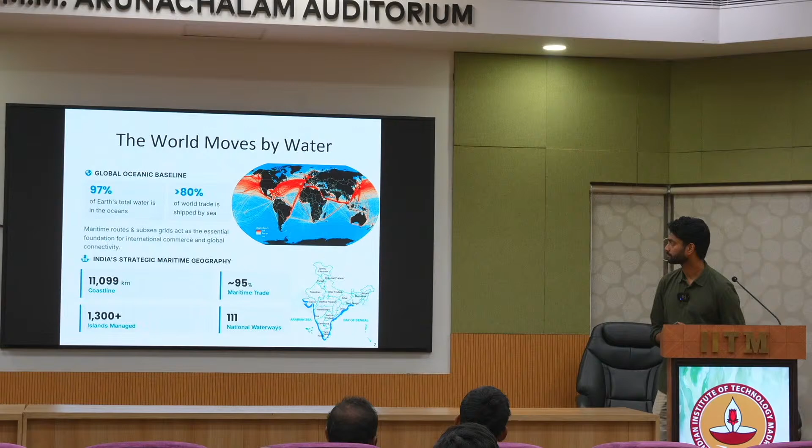So we already discussed briefly why naval architecture and why ocean engineering. We deal with ship designs and offshore structures, and also marine technologies. And then, why in IIT?

Because there are only 2 BTech programs offered among the IITs — it's very rarely available in all engineering colleges. For example, IIT Kharagpur has naval architecture, IIT Madras has naval architecture, that's all. Then Indian Maritime University, a Central University in Vizag, has naval architecture. And CUSAT, Cochin University has naval architecture, and Andhra University has naval architecture.

And there are very few private colleges which are not very well known — Amity University in Chennai also has naval architecture. So these are the colleges that offer naval architecture, but there is huge demand in the future because India and the world are focusing on maritime activities, for sustainable maritime activities, as well as to have a blue economy.

What are the careers? As of now, there is traditional naval architecture which deals with ship design, but now AI, digital twins, and autonomous ships are also coming into picture. So it's a highly interdisciplinary topic now.

Naval architecture, like I mentioned, is an island. The ship is an island. So we should know about all the engineering components that come into picture. We should have knowledge of electrical engineering, piping, machinery, and also steel structures, because the ship hull is made with steel.

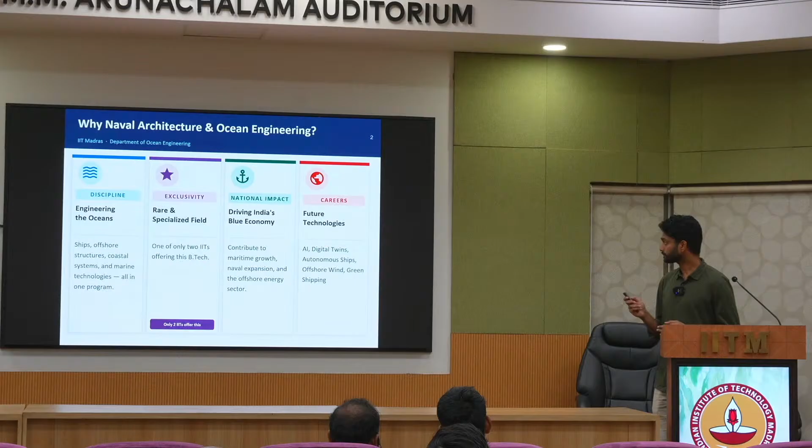So what you will do as a naval architect is design ships, underwater bodies, or offshore structures, and then build them in the shipyards, where you can also be an engineer doing survey for the ships and managing the shipbuilding, and also go for sea trials after the ship is finalized and constructed. Then there are offshore structures like oil rigs and wind farms, and also underwater vehicles and marine robotics. These are the different areas. The list goes on, but these are the primary ones.

I know your eyes will go to the bottom part right now, what is the package, but these packages are subjected to market risk. I can't promise them. You have to carefully invest by deciding what the discipline is about.

You can be in defense, you can become an Indian Navy officer, you can work in DRDO as a scientist. We have a lab, the Naval Science and Technology Laboratory in Visakhapatnam. It's a very huge lab with a 500 meters long towing tank. Imagine a 500 meter long tank, 10 meters wide, where you put a ship and test it before it deploys into the sea.

We also have similar equipment here at IIT Madras. We are blessed with that. I'm going to tell you about them in subsequent slides.

These are different areas again where you can get lucrative packages, but I can't guarantee that all of them will come for campus interviews, because most campus interviews at the moment are from data science and AI. Very few come for the core companies. But if you're good in your discipline, if you're interested and excited from this bench, there are opportunities for sure.

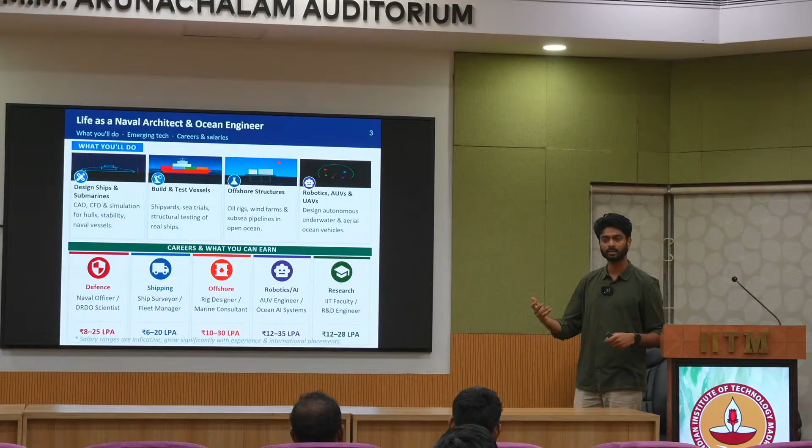So when such a ship enters the port, the depth will be around 40 or 30 meters, and you have to provide that navigable depth. We dredge it to accommodate the ships. But the bottom is not always rock—sometimes it's sand or mud, which will always bury the navigation channel, so you have to do this dredging again and again.

So what we do is model that in the computer. We simulate, taking all the physics into account, and create a navigation simulator. We can predict how long it takes to bury that navigable channel. Accordingly, we can plan the dredging, or do optimization studies to try to avoid dredging as much as possible—that is called digital twin. Before we do things, we already analyze them in the computer. When the ship enters, even the captain will have an idea of how the ship behaves in such an environment, which can also be simulated in the computer and kept on the ship.

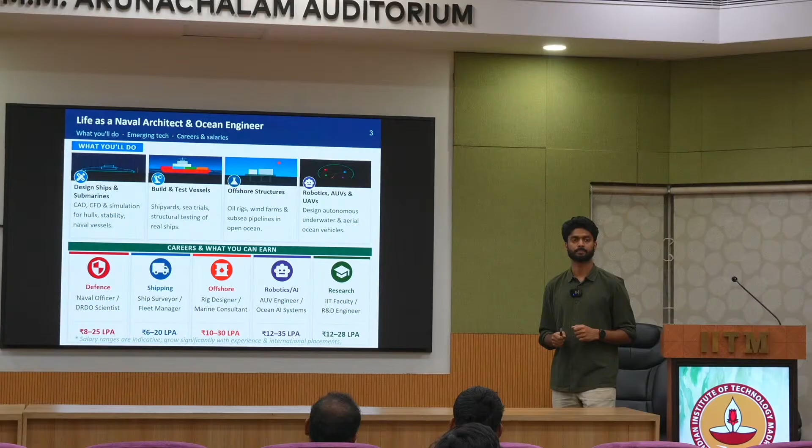So that is about naval architecture. Why should you take it? If you're interested, if you're excited, if this topic excites you, I would recommend you take it, irrespective of packages and what will happen in future, because future is not guaranteed—everything can change with a small scenario, we never know. So go with your interests, go with your excitement, I would say.

So from now, I will discuss the department, and then the department programs and courses we offer, and I'll also tell you what we teach in those courses so you'll know what you'll study in future. If you're good at physics in certain topics, you can relate whether this is your topic or not. I'll also introduce our laboratories and infrastructure, so in future, if you join, you can do all lab work there. We also have research centers, and I have a slide about placements and alumni. All right, let's start with the department introduction.

The department started around 1977 as a center. It was not a department initially—center means there are no students, we don't offer degrees when it's a center, but students work on research. This was previously part of civil engineering; all the equipment was there before it moved as a center. In the 1990s, major experimental facilities were developed in collaboration with Germany, as far as I remember. Then we developed wave basins and towing tanks—I'm going to explain what those are.

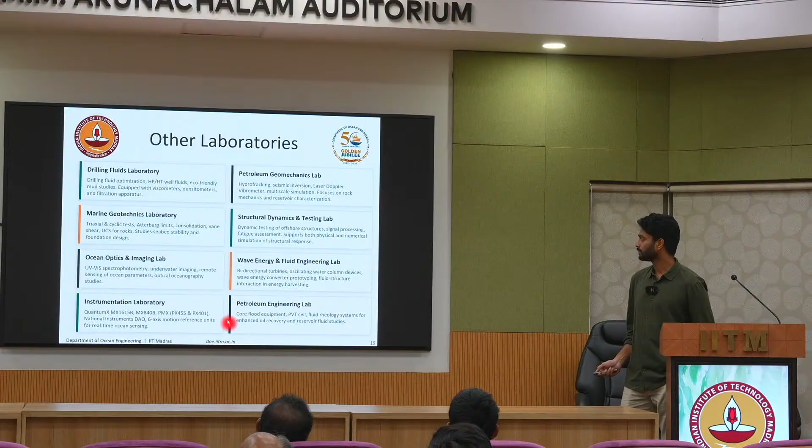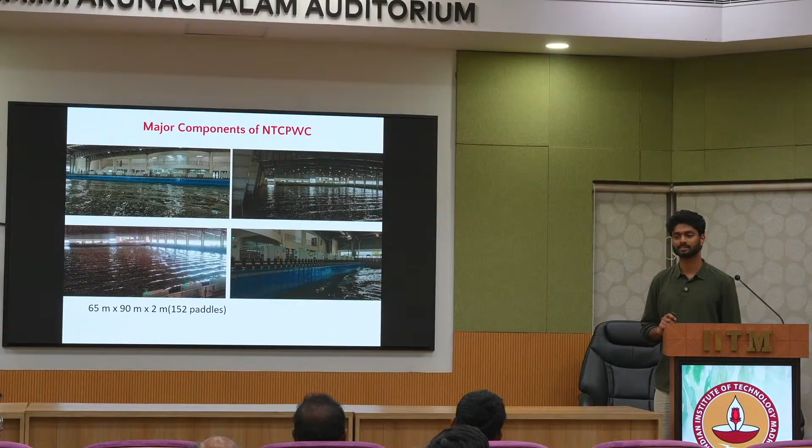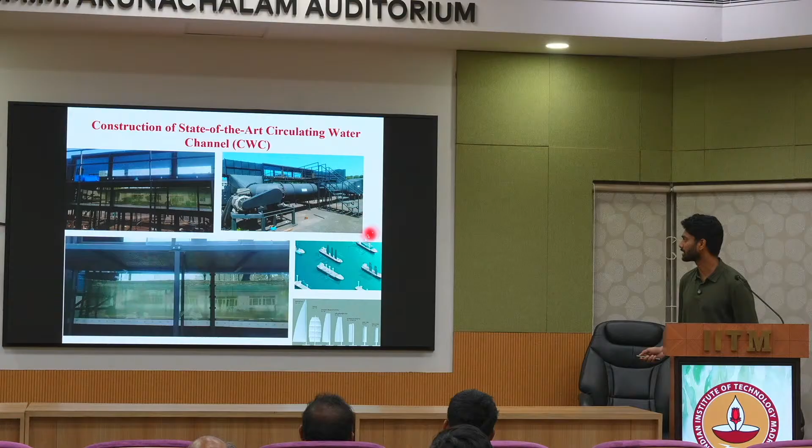So this is a newly constructed circulation channel. This is to study ships with wind-exposed equipment, basically to reduce fuel consumption for the ships.

So we have sails here. Previously, ships were sailed using sails, right? We use the wind energy to move forward, and we do have such equipment.

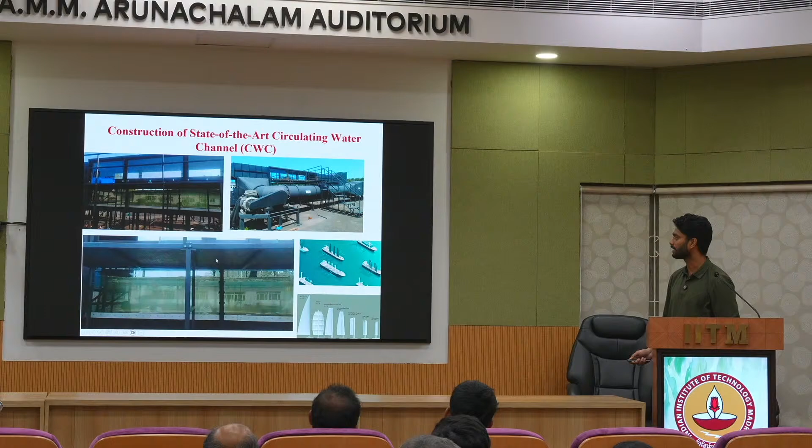To study the interaction between fluid and also air, we have a circulation channel with water that is flowing, and we also have air flowing on top of it. Then we try to understand the flow around the ships, and try to understand the physics behind it.

What about the internship opportunities? Because, as far as my knowledge, India doesn't have that big vessel builder, if I'm not wrong. Moreover, that technology we borrow from Europe or even from Chinese.

And if at all we want to do internship, the possibility is limited only with the PSUs.

Not true, there are many companies that we can go and work. For example, L&T is working vastly in renewable energy and also offshore engineering and shipbuilding. And ExxonMobil works in offshore, in Bangalore, that's also a very big company. But among PSUs, there are big shipyards, like Cochin Shipyard is very big, and we have Goa Shipyard, Hindustan Shipyards.